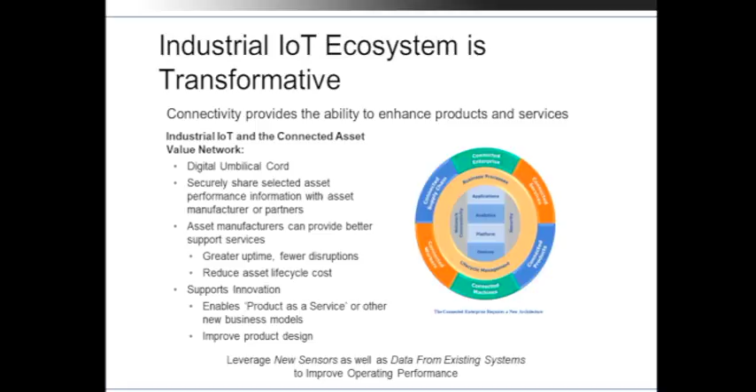The other aspect is availability. There are two aspects of industrial IoT we'll be talking about today: improving availability of machinery and improving utilization. Today we've started to see a tremendous emphasis on improving machine availability by collecting data through the industrial IoT to provide equipment protection algorithms, or to effectively monitor equipment remotely and provide intelligence, whether through data scientists or automated algorithms, that allow third parties to ensure your equipment doesn't go down because of false trips or false signals that can shut it down erroneously.

We see this in turbine machinery applications, oil drilling applications and things of that nature, where machinery will often shut down erroneously when in fact it should have stayed up and running. There is also a tremendous amount of interest in incorporating adaptive control algorithms, where you can modify the equipment's operational parameters to work through variations in the materials flowing through the equipment, whether in a pumping application or a machine tool application.

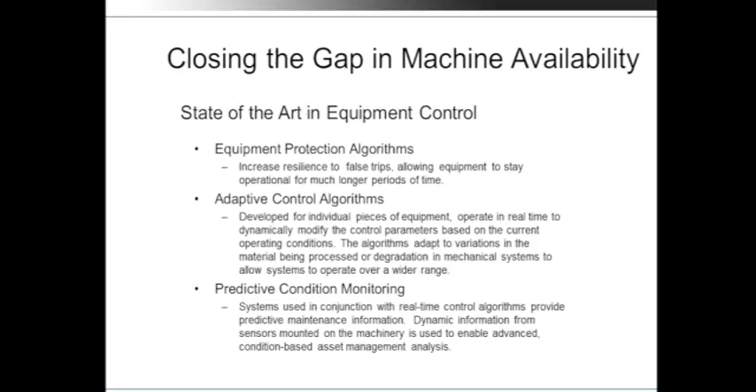The third item, where we see a tremendous amount of effort, is predictive condition monitoring. This is pretty much the killer app for industrial IoT today. Many companies are focusing on replacing traditional scheduled maintenance with predictive maintenance. So predictive condition monitoring is one of the biggest areas of interest in this market today.

Now, the other aspect from the manufacturer's perspective, we want to think about increasing machine utilization. For the most part, we believe that a tremendous amount of the equipment in the market is heavily underutilized. A lot of manufacturers have an excess of capital equipment in their manufacturing operations, and they effectively could do with less.

So what we want to think about is the industrial Internet of Things is providing intelligence, providing visibility to allow manufacturers to improve their machine production output through better utilization of their labor as well as their equipment, because labor is also an important component of the manufacturing operations today.

So through the industrial IoT, we have seen already that companies are identifying whether it's a machine that isn't operating properly, or it's inefficient, or they're identifying the way that the operator actually is performing at the machine, whether they're taking too much time to set up a piece of equipment, or whether they're setting up the equipment at the inappropriate times of the day. So that's a critical part of this industrial IoT, is creating that visibility.

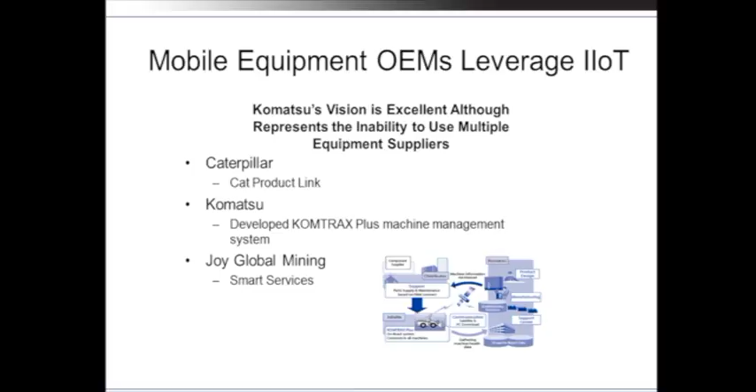So, for the most part, we believe that this whole mobile equipment is really a revolution that has taken place over the last 5 or 8 years within the mining industry, and a lot of it has to do with, in the case of Caterpillar and once again Komatsu, not only connecting their equipment through these remote mobile devices, but also the fact that they've incorporated autonomy in the equipment. These are the first generation of self-driving, self-navigating vehicles that are out in the field, and they're able to direct themselves without any kind of drivers.

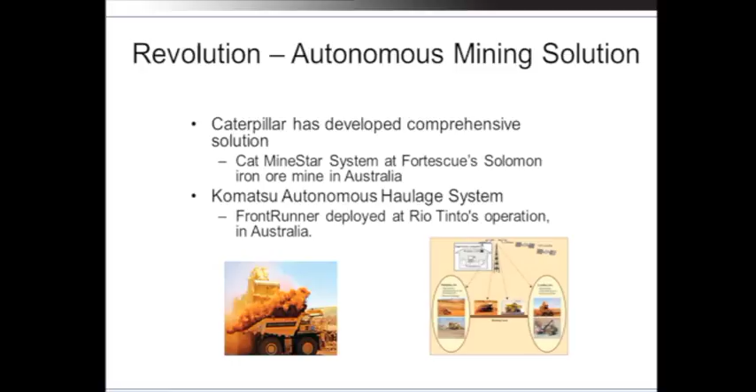And one of the impetuses behind this was the fact that this industry is typically located in very remote locations. The cost of a driver in these locations is very expensive, and the idea of incorporating autonomy was really driven by some of these business issues that they were facing.

But one of the things you have to recognize is these systems are closed, and one of the biggest complaints when you talk to mining industry operators is that what you have is fundamentally a system of connected devices, but it's completely closed. So the idea of having a heterogeneous group of operators in the same ecosystem is not really practical.

So, for example, if Komatsu and Caterpillar both had mining equipment within one facility, they would be both using their own type of industrial Internet of Things ecosystem, and they would never be merged together. And that's one of the biggest challenges going on in that particular industry today, is to look at ways of integrating or creating standards that would allow these two bodies to work together.

So, to further the discussion of the industrial Internet of Things, quite a bit of it is about knowledge discovery, or machine learning, I think is the common term that's used in this particular market. What I wanted to talk about here is that there's a tremendous amount of analytical tools that are being developed today to create knowledge, and that is the knowledge created through vast amounts of data.

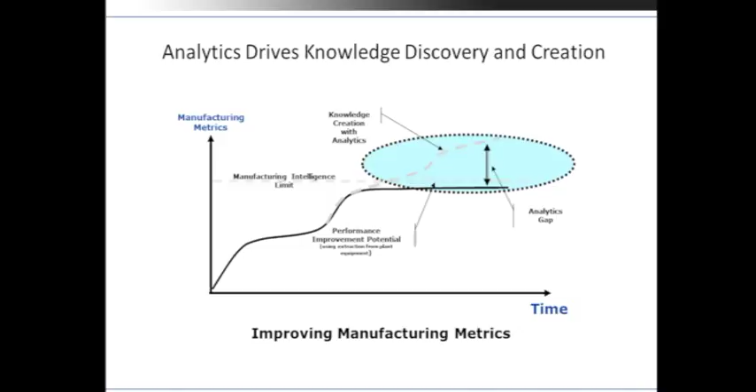Now we'd like to look at a business case for industrial IoT in the metalworking industry, for example. We've done some analysis over the years. We've been collecting data on the machine tool business since I've been at ARC, for almost 19 years, and our information on this particular business is pretty solid. And what we're looking at here is the machine tool industry, which is comprised of vertical cutting mills, laser, horizontal machinery, EDM machines, and water jet cutting, for example.

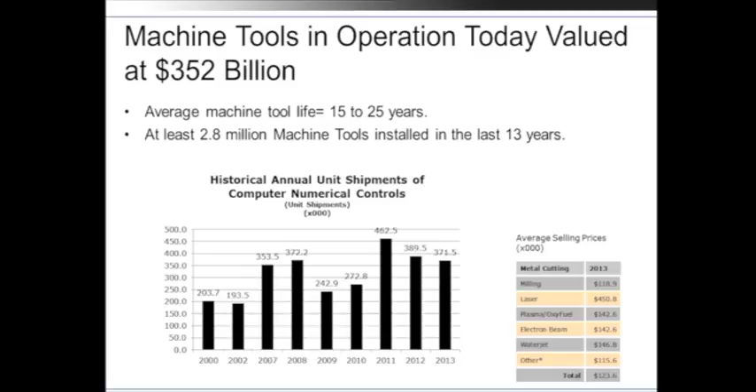So we've looked at this business, and today we believe that this market has about $352 billion worth of machinery installed, and that amounts to about 2.8 to 3 million machines installed globally. And so one of the challenges is we believe there may actually be too many machines in the market today, and people are acquiring machines unnecessarily. So we've gone through a simple analysis, and if anybody is interested, I can certainly provide later on the details of how this was developed, but I want to just give you the high-level results.

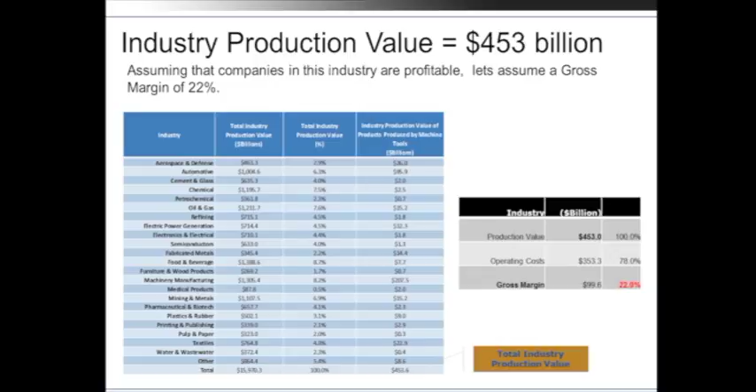And first, what we did was look at the overall production value that is generated as a result of utilizing these machines, and we're looking at $453 billion worth of production output from these 2.8 million machines. Now let's assume that the average manufacturer has a gross margin of around 22%. That means the operating cost here is roughly $353 billion for these machines. So what we did was we backed that out and assumed some average cost of operating the machines.

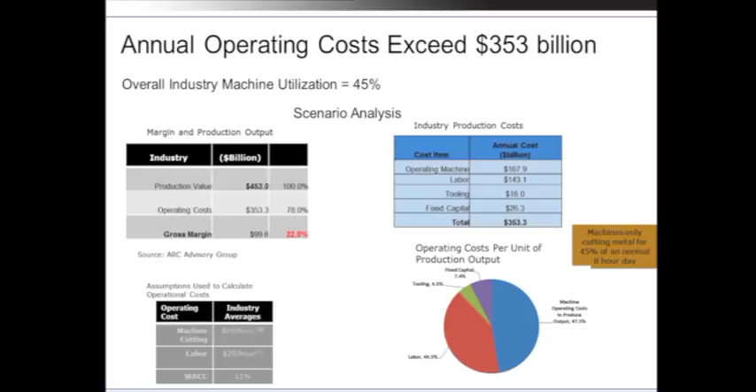So what it suggests is that companies are operating either blindly or they just don't know how to improve the utilization of their operations. And we feel strongly that this is a very strong case for connecting your machines, using smart connected machines in this industrial Internet of Things environment to improve your costs, to improve your utilization.

But some of the scenarios that we've come up with that might be affecting the utilization: there are many specialized machines on these production floors that simply have limited use. There are other situations where the process setup is limiting utilization. There may be simply too much capacity, as I mentioned before, in the market, where there's just too many machines being purchased, and there's a lot of hidden equipment out there. There's also the possibility that there's too much variation in tooling or the materials being purchased, resulting in a lot of waste on the production floor.

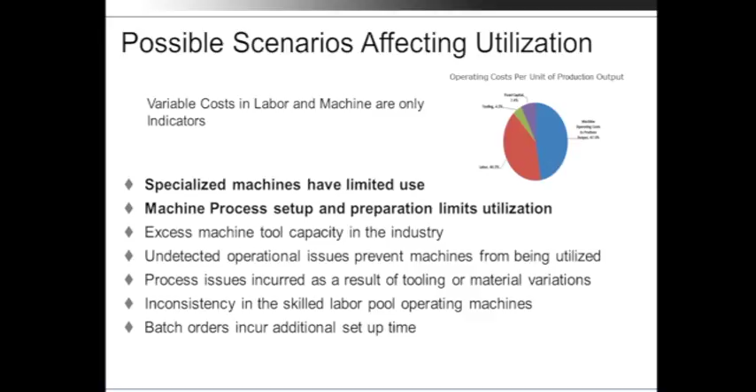And then the labor pool is one of the other factors where, in this particular industry, you require a skilled labor pool to operate these machines in a consistent fashion. And as we have a high turnover in labor, or the skilled workers are exiting the market, we have difficulty in setting up this equipment and providing good quality output. The other aspect might be batch orders, a much higher number of batches being run on these machines as we go toward smaller lots and more production setups that need to be done.

So this is really where IoT is a business opportunity to improve these machines. And it's a business opportunity for the machine tool builders to support their equipment in the field. We believe that the equipment operators could very well be an integral part of solving this problem by providing the connection to the machines, providing possibly the data scientists, the cloud repository, and all of the infrastructure that would be necessary for the manufacturers to export their data to third parties.

But overall, we believe that the opportunity for the machine builders would allow them to reduce their operating time for a particular workpiece that's being cut on the machine, because they'll have recommendations. They'll have better visibility into not only a single manufacturer's operation, but many manufacturers' operations, where they can start to make recommendations across different industries. So we find there's many benefits here you can read through.

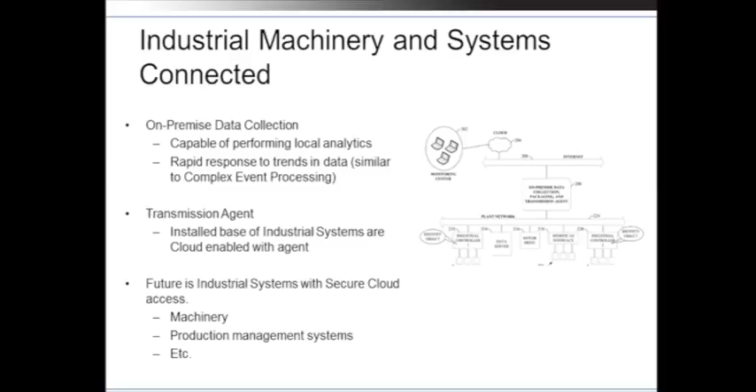And one of the areas where Rockwell actually has been providing services for close to 3 or 4 years is in their motor control centers, where they provide these remote connections to their drive technology located in their customers' plants. They not only pull data and put it into the cloud, which is the Microsoft Azure cloud, but they also provide the data scientist to interpret the data that's being analyzed.

And that's a very critical component, because a lot of manufacturers today just simply don't have the expertise in-house to analyze the data. And so through monthly service agreements, these secure connections are being monitored remotely at some large service center, providing support to manufacturers in terms of when they should be replacing pieces of equipment or shutting down pieces of equipment. But it's already been in place and proven to be quite effective.

The other company that I've been looking at too, in terms of the overall implementation of the infrastructure required for the industrial IoT, is certainly Siemens with their analytics offering. They've been effectively using the digitalization strategy to push out the use of digital services to their customers. And they've been doing this across some of their rail business, some of the medical business, and also the industrial business.

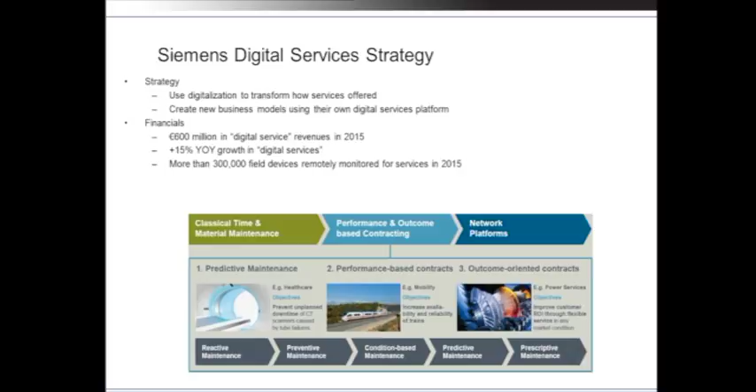And most recently they reported in their financials, if you can find this as well, over 600 million euros in digital services were pushed out in 2015. And that was 15% year-over-year growth in their particular services. So what we're seeing here is not only machine builders can profit from this, but also automation suppliers can look at this as a new revenue stream for their businesses as well, if they can provide the infrastructure. Because machine builders aren't necessarily going to be able to provide this infrastructure.

So when we look at Siemens product lines, we're looking at something called Sinalytics, which is the way they've branded their platform for providing analytics as a service, their own service offering for analytics. But then they've also provided something called MindSphere, and MindSphere is where a machine builder can build applications on top of the Sinalytics platform to develop their own analytics specifically for their equipment, whether it's the mobile machinery market, or cranes, or elevators.

And here, this is where the machine builder would incorporate their knowledge, their intelligence to develop the knowledge systems that will develop more and more capabilities over time to improve the operations of their equipment in the customer's plants.

So those are just some examples of industrial automation suppliers today who are actually supporting this whole movement toward industrial IoT, and certainly there are others that are moving in this direction, whether it's GE and Beckhoff, et cetera. But these are the ones that I closely watch because of my focus on the discrete manufacturing space.

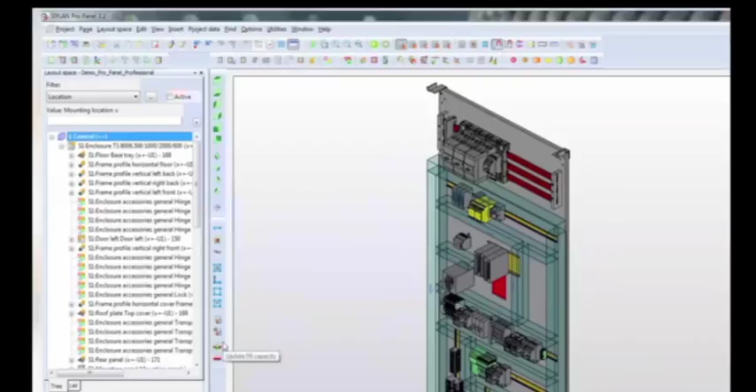The Friedhelm-Loh group of companies works together to simplify and unite the design and manufacturing process, a major portion of Industry 4.0. EPLAN's computer-aided engineering environment enables designers to pull in an actuator along with its manufacturer-provided attributes, auto-populating the electrical and mechanical design with parts and creating a bill of materials that interacts with supply chain and inventory software.

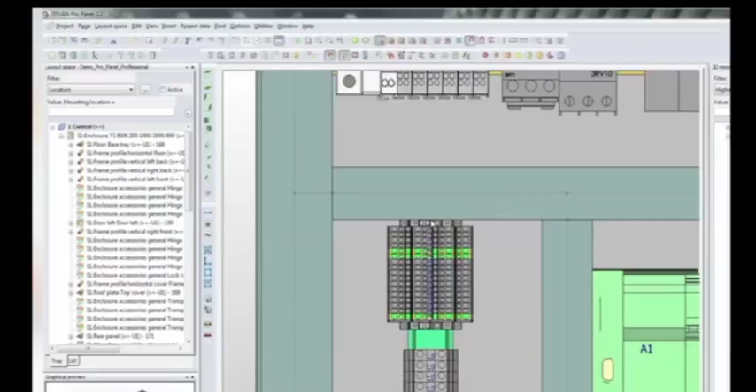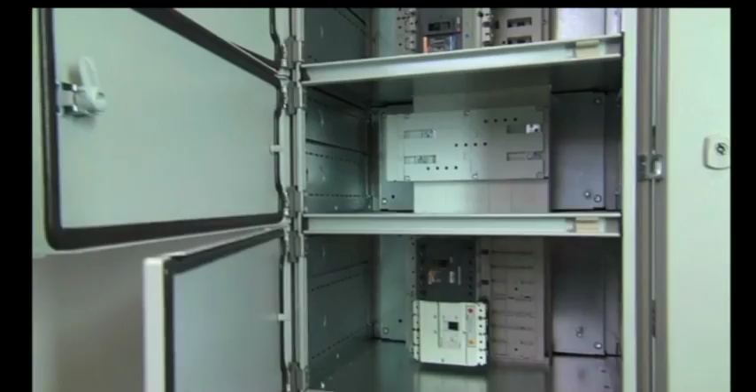Component interfaces within the enclosure can then be simulated to ensure proper interaction and operation, and the design can be thermally simulated for excessive heat loads between components and within the enclosure, ensuring that finished products will function exactly as intended upon installation. Once the design is completed, a modular Rittal enclosure is selected for its ease in hardware and cooling systems installation. Adding custom holes and installing enclosure electronics is automated thanks to Kiesling's panel cutting and wiring machines.

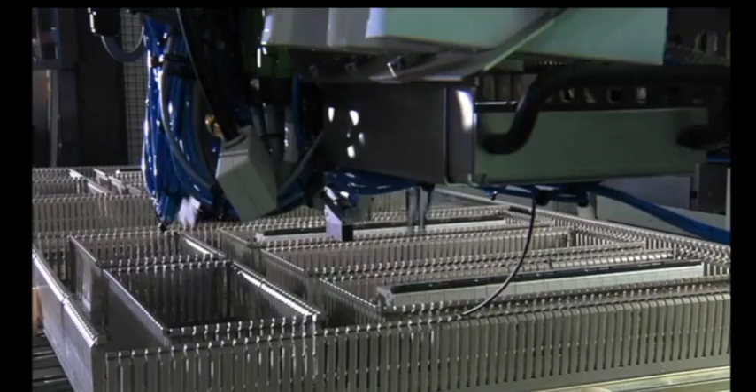This interconnection simplifies the original design and enables automatic updating of the complete design if the first step ever changes. From wiring diagrams to custom holes, automatic updates tremendously decrease design iteration time.